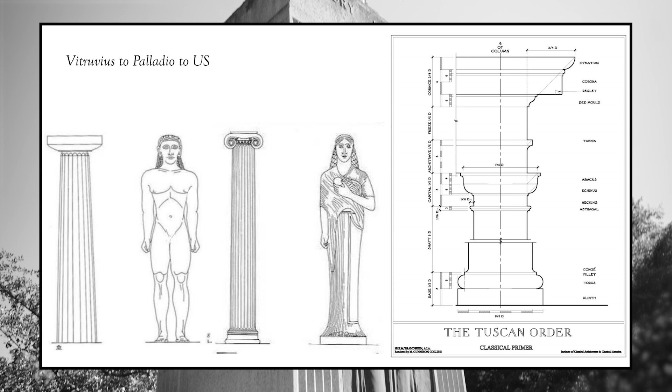Vitruvius spoke about the gender of those things. He said the Tuscan order is a masculine order. Well, what does that mean? And the Ionic order was a feminine order. The Tuscan order has a relationship of 1 to 7. Well, what does that mean? What they're talking about is the diameter at the base of the column, and then how many tall that is. So if say this is 12, then 7 of those diameters would be the height.

And you'll see, if you look at this, it's in your packet, it says base 1/2 D. D is the diameter at the base of the column. And so all of the sizes for everything in that order are based off the D, the diameter. Now, where does that come from?

So if I measured my foot, it's 11 inches long. I am 76 inches tall. I'm 1 inch from being perfect. So I'm not quite 1 to 7, but it was based on an ideal proportion in the human body. My hands, my head, my ears, my legs, everything is proportional, right? And there's a system for sizing it up, drawing the human figure. The same thing was true in architecture.

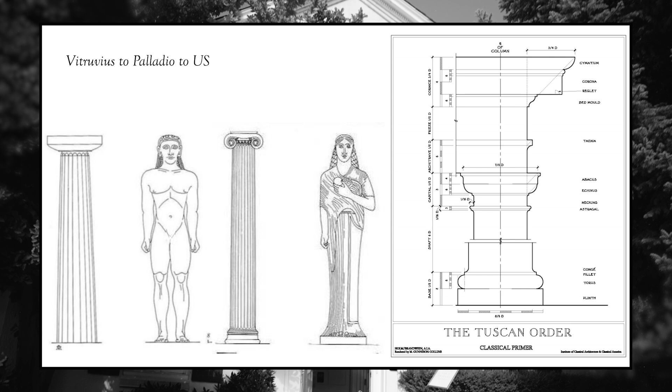So go home tonight, measure your foot, see how tall you are, see how close you can get to being perfect. But the feminine order, the Ionic order, is like 1 to 8, or 1 to 9. You'll see these things vary a little bit. So there is a proportional relationship, and that's why when this order is broken out and all of these different parts are sized, it's sized off of D, the diameter, so there's a unifying whole. Everything's proportionate. There's a system there.

And even better, there's a human scale to it. That's why we walk into some of these spaces and go, I really like it here, but I don't know why. As I explained earlier, all of the moldings that we use in our houses today are based off this classical system. The height of our chair rail is based on the top of the pedestal. The picture rail you'll see in rooms is the top of the taenia, the top of the architrave.

And so I want you guys to get good at understanding terms like entablature, frieze, bed mold, dentil, where all those things go, because most people don't get it. Most people screw it up. Once you understand those things, you begin to build beautiful things. Back to this door header, right? Here's our frieze.

Here's our architrave, okay? Architrave is just door casing. Here's our frieze. This is called a pulvinated frieze because it moves out. And then you've got a bed mold, and in between the bed mold is a dentil. You got a corona and then a cymatium, okay? So that's exactly what we've got here.

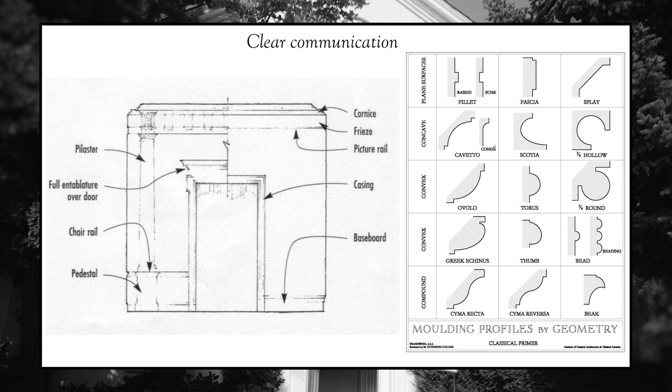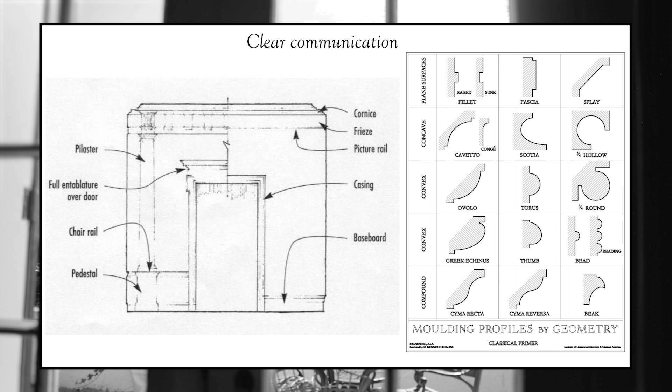The other thing you need to remember as you design moldings is this is your palette sheet. These are the shapes you use. You don't need any other shapes. And if you've sat there and go, wonder what I should do, it kind of just wanders off, right? There's actually purpose and meaning behind these moldings. And so we've got plane surfaces, concave, convex, and compound. So we'll talk more about this, but there is a rationale with how this all comes together.

And the thing that makes it wonderful is that you can be in a 50-foot tall space or a 15-foot tall space, and you still feel comfortable in that space. You don't feel overwhelmed because there's a human scale, because it's all based on these proportions, right?

There is hierarchy, okay? Now, hierarchy means that if you're doing a house, every room doesn't get every molding, right? You've got bathrooms and closets that shouldn't be as elevated as the main formal hall if you're doing a classical space. And that's what this is showing from Robert Adam's book. This is the exact same space. Door, two windows, door, two windows, door, two windows. But we've elevated it by adding more moldings and more details.

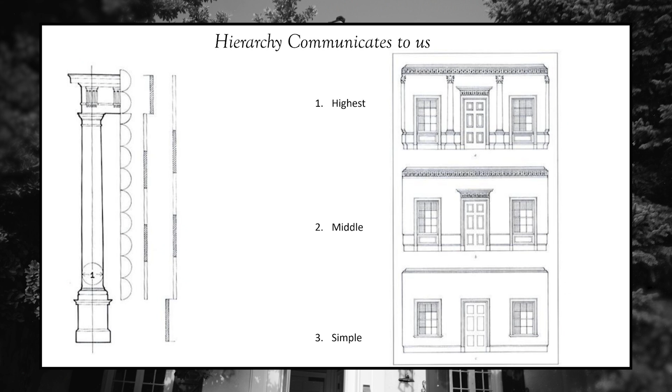In this one, you just have a base and a crown. In this one, they've added a chair rail, they've elevated the door, and they've added a little bit more cornice, and then they've put the pilasters in there, right? So there's a hierarchy to this and how they put this together.

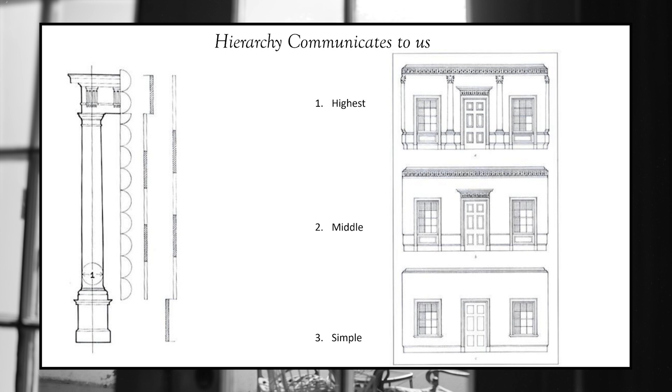There's also an idea called punctuation, which is probably the most important thing for you to remember when you're thinking about door casings, window casings. It is never a little 2-inch molding. It is almost always something bigger. So what you have in this classical system is you'll notice that there is a visual phenomenon, a geometric symbol that you'll see on here, and then an arithmetic ratio.

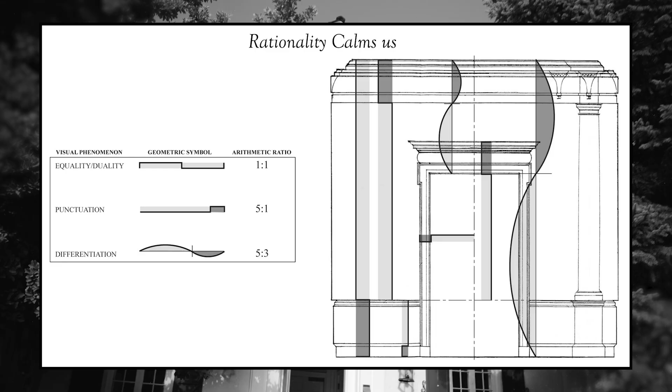Everybody heard of the golden ratio? Okay, so that's that 5:3, right? And you'll see as this space is laid out, and if you guys can get good at laying out your spaces like this, magic, okay?

Now, why? Well, the idea of punctuation means that the width of an opening should get framed or punctuated with a certain size. And so in the Georgian era it's about 1 to 5, and the Federal era is about 1 to 7. So that means if you have a 30-inch opening, you have a 5-inch casing, right? There's an arithmetic ratio there, and again, this is in the classical system, so we'll do the math later, but sometimes these casings can end up being 8 inches wide, and you're like, I'm never going to put an 8-inch wide casing in a house.

Okay, well, you don't have to, but the realization is that it's not a 2-inch casing, that you're trying to find that balance here, and most people that study and look at this classical stuff don't want you to do the math. In other words, I mathematically figured out every single one, that's not really the magic that happens, but there is a realization, hopefully, on your part that it is bigger than most people are putting in.

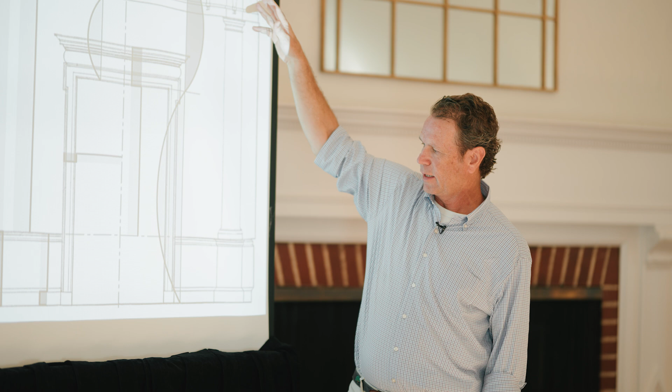The differentiation, right? See what they've done here is that the height of this door is differentiated, that 3 to 5 ratio. And even the relationship of this to the crown, there's another one, and they break it out and show that even in the dentil and stuff like that, they have this differentiation. But you have punctuation over the whole room in the chair rail, and then from the chair rail to the entablature. So realize that all these parts and pieces are coming together, and they're all speaking to one another and working.

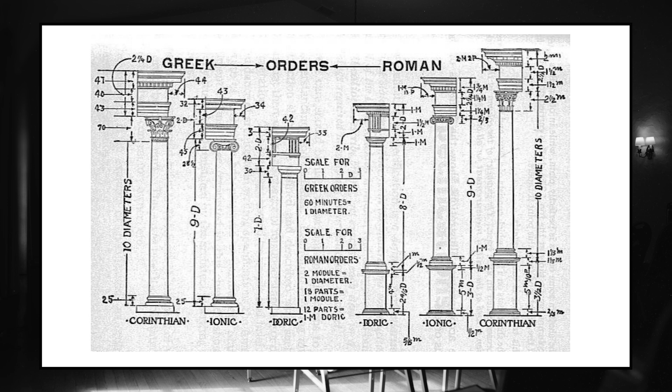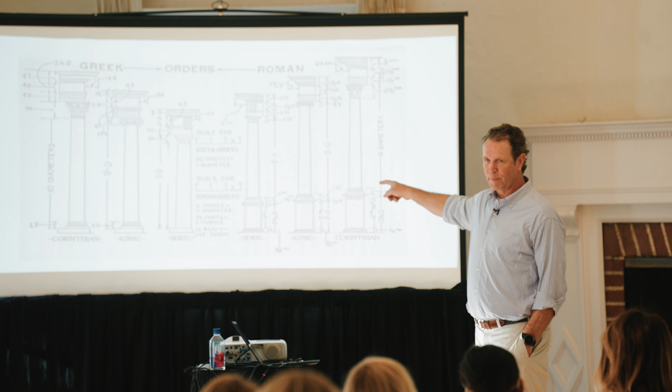And then the sad part of it is that these were things that were understood pre-1940. If you ever wondered why pre-1940 houses look better than post-1940 houses, it's because after World War II, you have production building, cheap and fast building, and we kind of forgot these rules. And this is in a 1926 builder's catalog. It's Audel's carpentry manual, built for carpenters. Even carpenters at that time understood the Greek versus the Roman orders, the differentiation and sizing. So a lost art that hopefully we'll start getting back.